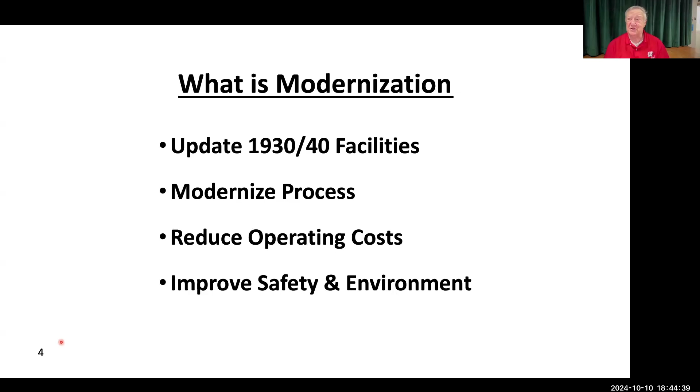What was the modernization program? In Dave Fordham's words, quote, 'The modernization program is a large-scale, multi-year program. Essentially, this program will replace most existing production facilities,' unquote. These existing facilities at Badger were built in the 1940s with 1930s technology, designed to last only 5 years. Then after 30 years, the facilities had deteriorated and worn out and had gone through 2 wars. Meanwhile, there were advances in technology that provided new processes that produced product better, cheaper, with less safety hazards to the operating personnel, and also improved the environmental situation.

The initial 1971 to 1980 modernization program - 10 years from 1971 to 1980, that's how long the initial program was. It was to cost $385 million, with 27 separate projects. Now remember, Badger is one of 25 ammunition plants, and all the other ammunition plants had modernization programs similar to this. So you can see there was big money, really big money, and by today's standards, even bigger money.

Here is a listing of the initial modernization program with its 27 projects. The projects are listed with the cost and the year of funding. The first projects in yellow are the only projects that were actually completed - those 5 yellow projects are the only ones that were actually completed. In the darker yellow, they were sort of partially completed.

Here's the year, 1971 to 81, and then you've got 27 projects going down here. Kind of small, but I think you can get an idea that there was a plan, and it was going to be money every year - $385 million. And we only did 5 that actually were completed. There were 2 that we did some work on. We did a lot of design stuff on some of these other ones, but some of them were just concepts. But that's what that initial 10-year modernization program looked like.

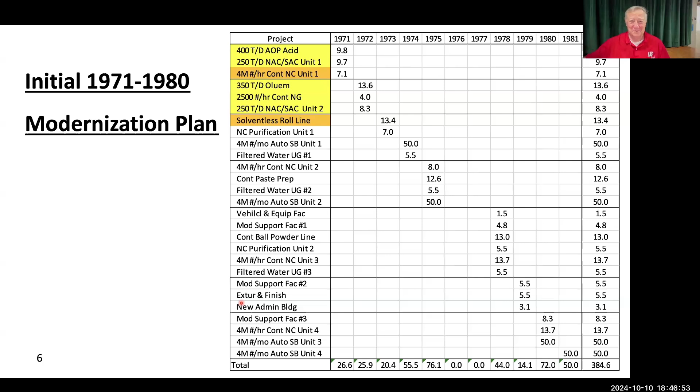So in here is where these projects were going to be. Now it's probably kind of hard to see, but here's a view of the map of Badger showing where some of these facilities are going to be. Now you look over here, here's where the main office building was, and one of the projects was to build a new administration building, a 5-cornered building, right there where the old maintenance area was.

Here's the first powerhouse, number 1. Here's the firehouse, which is still there. Then the new acid complex was out here, and there's going to be a new nitrocellulose complex right here. The nitroglycerin area stayed in the same place, only it was modernized. And then single base was going to be in all this area here in the northeast, where nothing was ever there, and new facilities were going to be put in.

Laboratory and ballistics used to be over in this area, was now going to be here. Here's the reservoir up on the hill. And then down here is the new shops area, going to be right in the middle of the plant. The rocket area stays in the same place, although it's modernized, and the ball powder facility stays in general in the same place, but would be modernized. And then the burning grounds would be moved over to the eastern side of the plant.

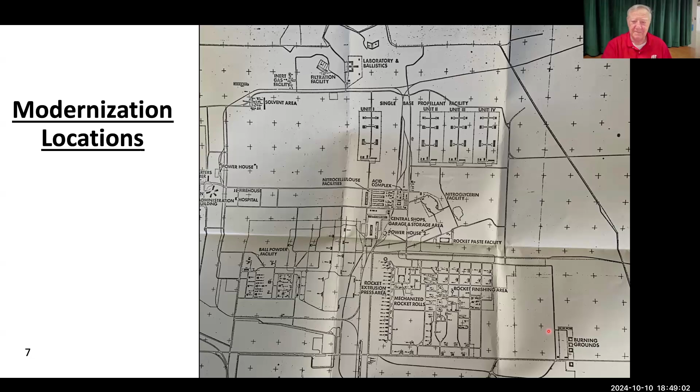The initial plan never happened like it just showed you. There were many changes. The time frame doubled to a 20-year plan from 1971 to 1992, and then it expanded a little bit beyond that. The total cost increased to over 600 million, and we only spent about 10% of that. Various utilities and environmental projects were added, increasing the total projects to 55.

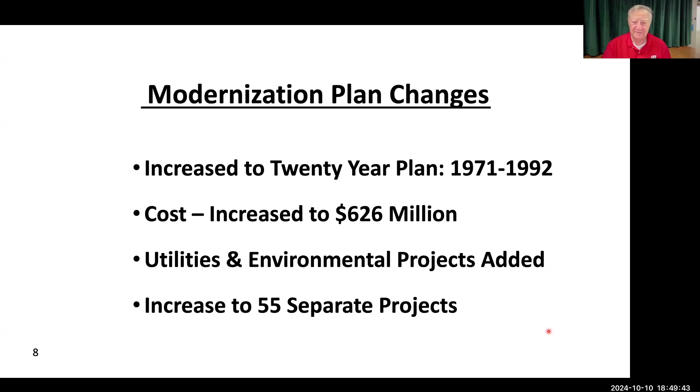The modernization changes happened in 1976. Major changes to the plan are shown here. Justification: we attempted to change existing facilities with the following priorities that you see here.

Economy of production, make things cheaper. Safety of operation, safer for the operators. Better pollution control - we knew at that time that we had to get better at that. Reduce noise. Overcome production deficiencies where we couldn't make something that we needed to make.

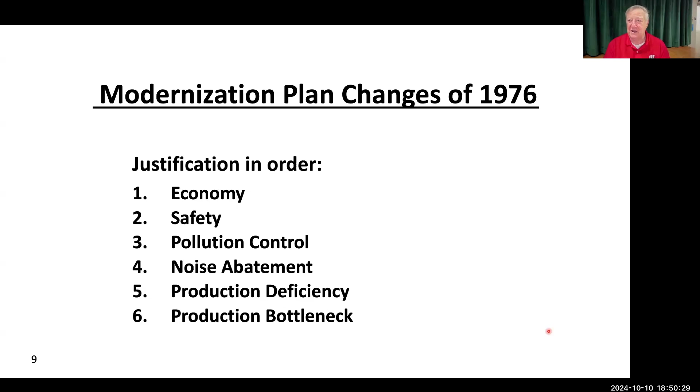And then elimination of a production bottleneck where we didn't know how to do something. Here's a listing of the 7 projects actually worked on. The last 2 were only partially completed, as you saw from the previous chart. Design and preliminary design work was completed on a lot of projects.

We had a 400 ton per day AOP nitric acid plant, 2 different nitric acid, sulfuric acid NACSAC acid plants, a 350 ton per day oleum or sulfuric acid plant, a 2,500 pound per hour nitroglycerin plant - I got to tell you a little story about that.

When we were trying to prove out the nitroglycerin plant, you got to do something with the nitroglycerin you made. Well, what are we going to do with it? We thought we could sell it to the people that make the nitroglycerin that goes into tablets for old people to make your heart beat better. Well, running our plant 2 hours and we had a year's supply of nitroglycerin. So we had to run it something like at least a shift or a couple of shifts, and we got so much nitroglycerin that we never did do a real prove out to make nitroglycerin, which is probably good.

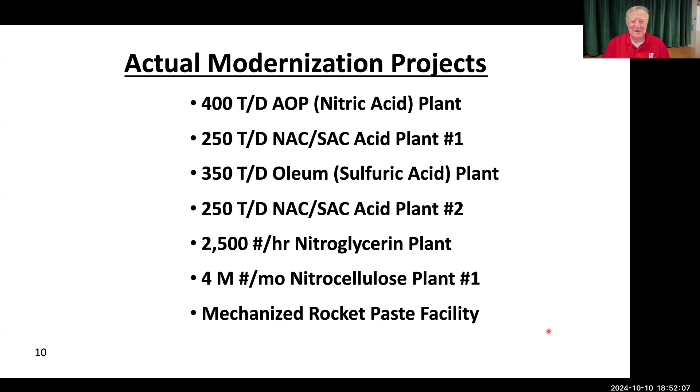The first project: the 400 ton per day ammonia oxidation plant, AOP, where we make nitric acid. We made 62% nitric acid from ammonia.

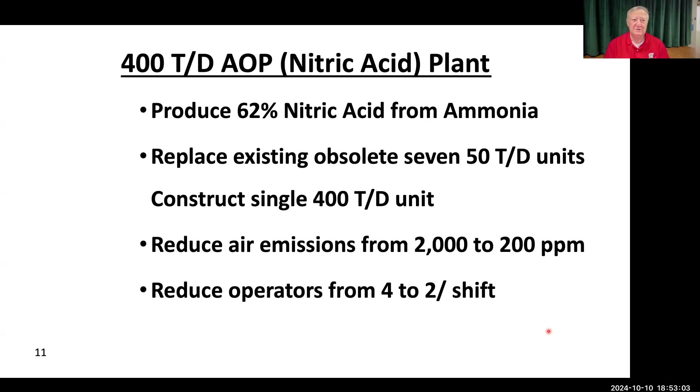The modern one-reactor plant replaces seven 50 ton per day small plants. The new process reduced the NOx, nitric oxide, pollution from 2,000 parts per million to 200 parts per million, and that at that time was within the pollution abatement limits. The number of operators dropped to only 2 - one on the line out in the process, and one at the control panel.

This little schematic shows the existing plant up at the top and the modern plant. Here you have all these compressors, which I'll show you a picture of, and a bunch of reaction vessels in this house. You replace that with one compressor and one reaction vessel - eliminating a whole bunch of things, replacing it with one big thing.

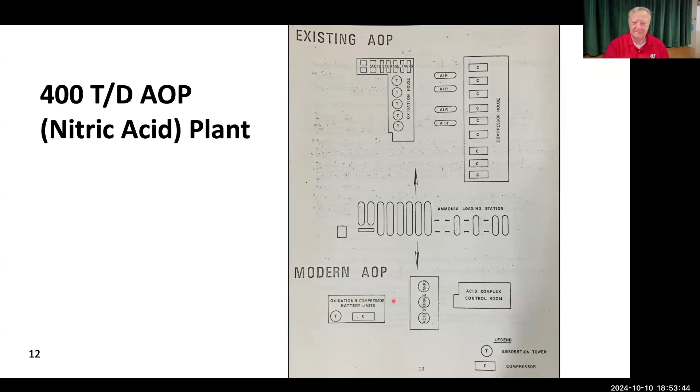More on the AOP project. It was designed by Chemical Construction, a company from Canada. Design was completed in July of 1975, construction started in July of 1973, and was completed in August of 1978 - 5 to 6 years. The first prove out happened in August of 1979, and from that there were only a few minor corrections that had to be made.

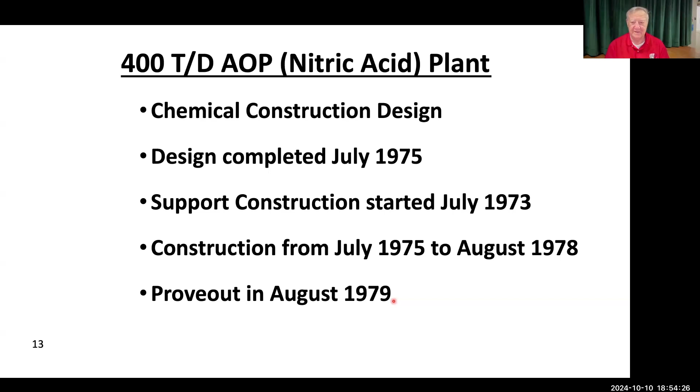Here's a picture of the old AOP nitration building. Big building made out of wood, and wood and nitric acid don't go together too well, so it's starting to come apart.

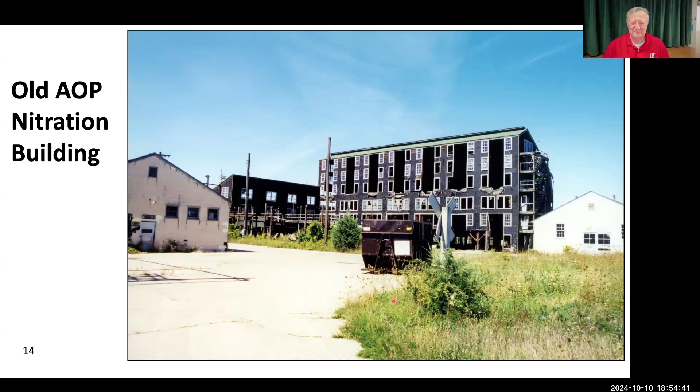Here's that old AOP compressor. This big wheel here is about 6 foot in diameter, and there was a belt that went across here, down around here and back. It was driven by an electric motor and compressed air here, and compressed air was pumped into the reactor where it was mixed with ammonia.

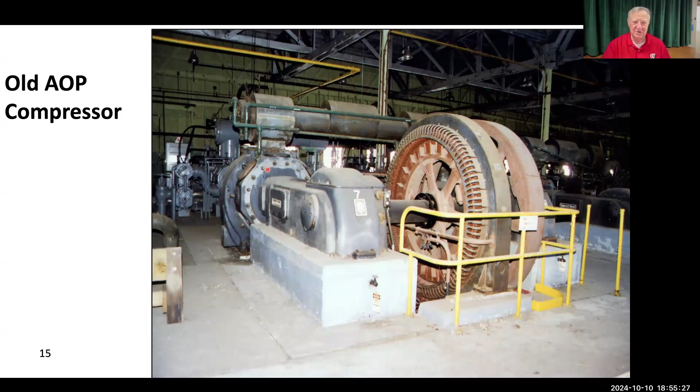This is replaced with a new AOP plant. This is looking towards the west - the administration building is out here, here's the main road coming in, and here's the reaction vessel right down in here.

Another picture of that - this is the absorption tower, about 180 feet tall I believe. Then here's the storage tanks after you made the nitric acid.

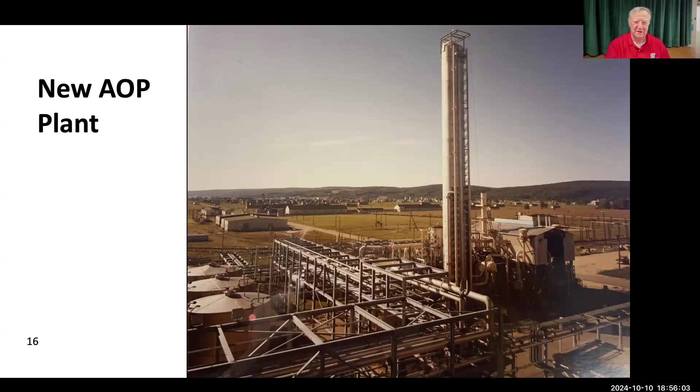Here's another picture looking towards the east, showing that big absorption tower. The operating building is right behind the speed limit signs, and these are ammonia tanks here - ammonia was brought in by rail. This big building is the NACSAC building, which I believe is 150 feet tall. Very big buildings compared to the old ones.

Over here in the corner, you can see the little edge of the main control building, and the controls for the entire acid complex were in this building.

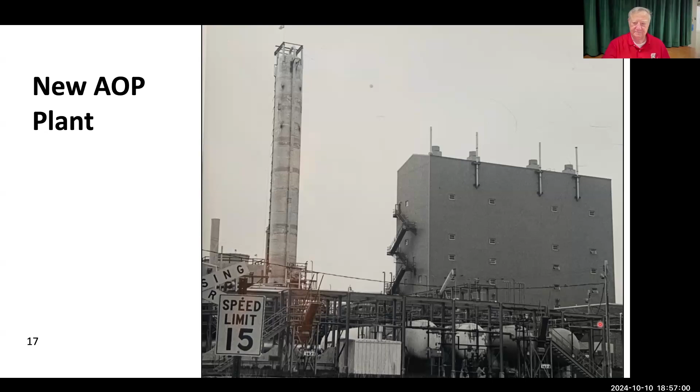Here's during construction of the AOP. This long train here is the heat exchanger. The actual reaction vessel is right here, this vessel here. And here's where the platinum gauze, where the ammonia reacted with air. In the old facilities, this vessel was about 32 inches in diameter, and this one is around 6 feet in diameter. As you can see, quite a bit bigger.

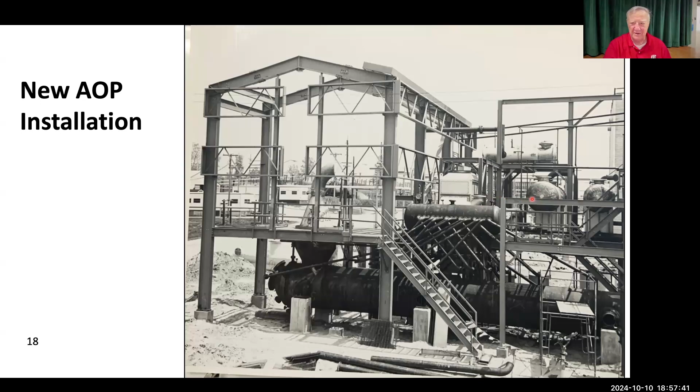I'm not sure where that went, but it ain't here no more. I had heard that it went to China eventually. I know the plant went to Louisiana to start with, and from there I think it went to China.

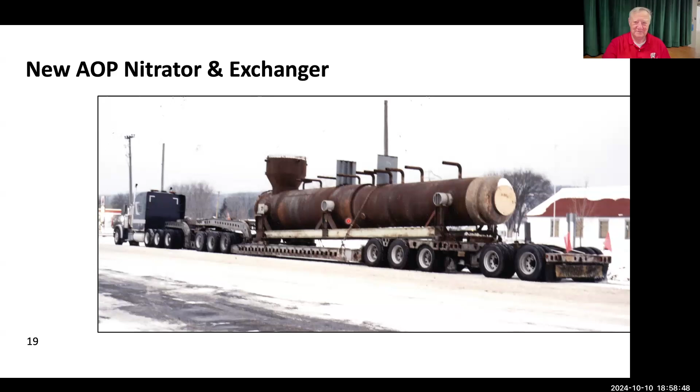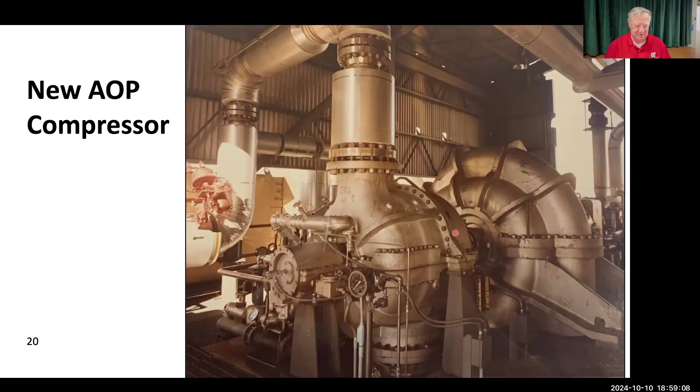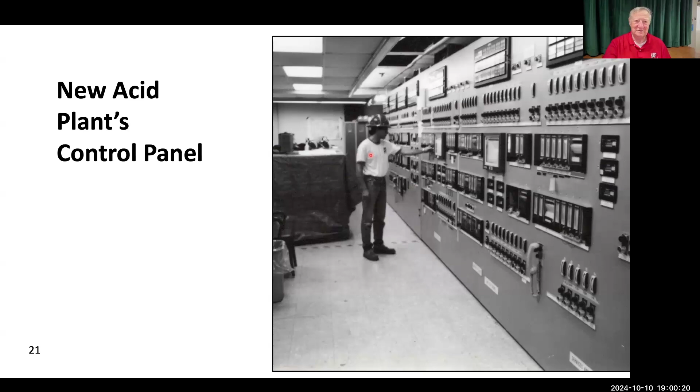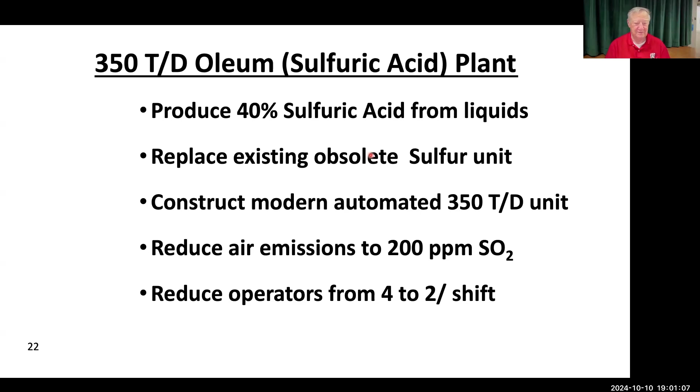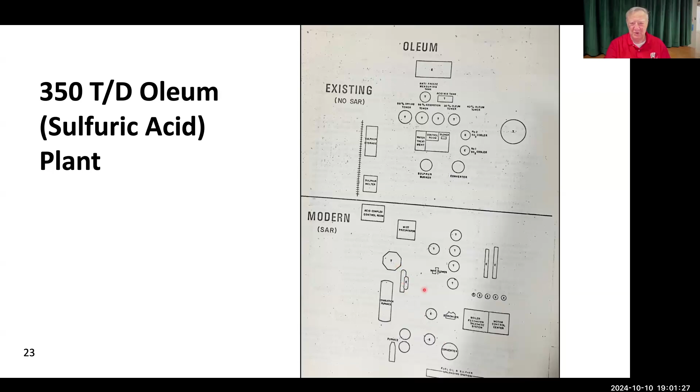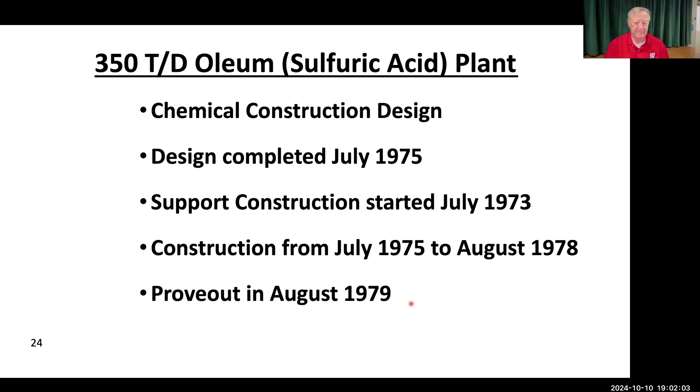This is on the south side of the acid complex.

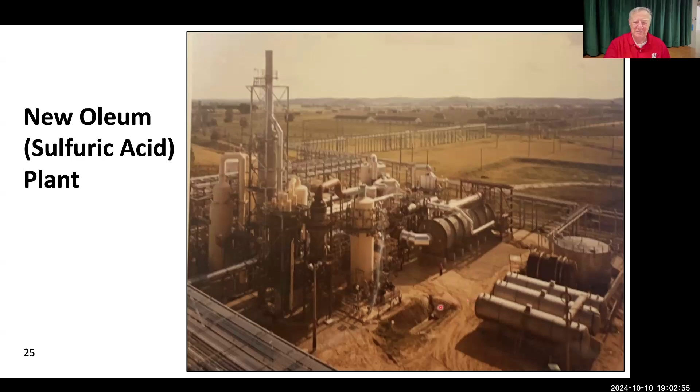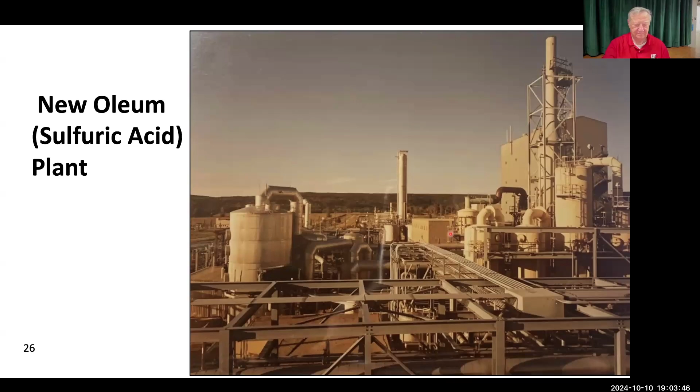Next project, the NAC/SACs: nitric acid, sulfuric acid concentrators.

This plant produces 90% sulfuric acid and 98% nitric acid, and it replaces these obsolete units. The new process reduced the NOx air pollution down to 200 parts per million, which at that time was the limit. The number of operators was reduced from 4 to 2: one person out in the plant and one person on the control panel.

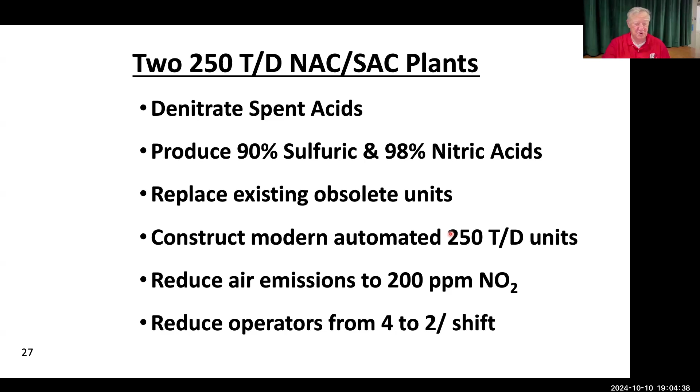Here again is another little sketch of the plants. You see there's separate NAC/SAC buildings, process buildings, a lot of tankage, different parts to it, where you put all these buildings into one building. This shows the three of them, but they're all in the same place, the same building. A little schematic showing you go from a lot of processes down to a single process.

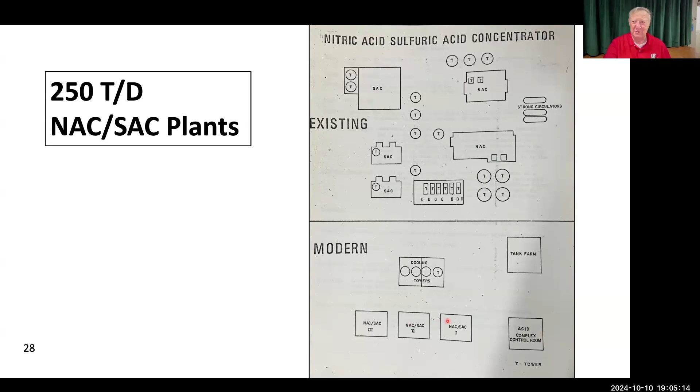These NAC/SAC plants were also chemical construction design from Canada. The design was again completed in July of '75, and they started construction in '73, and construction was completed in '78. And again there was another initial prove-out in '79, and they found a few errors. They were a little more serious in this case, but there were errors that were found.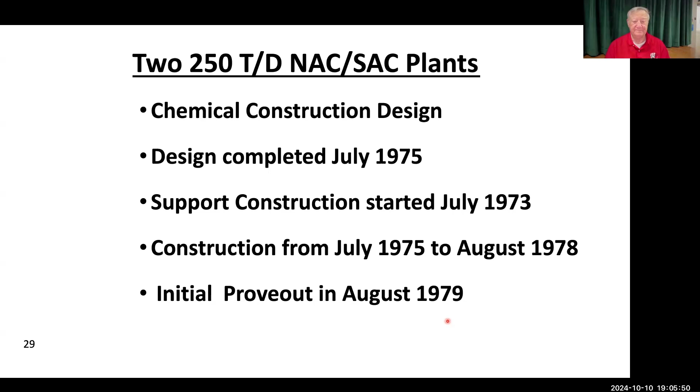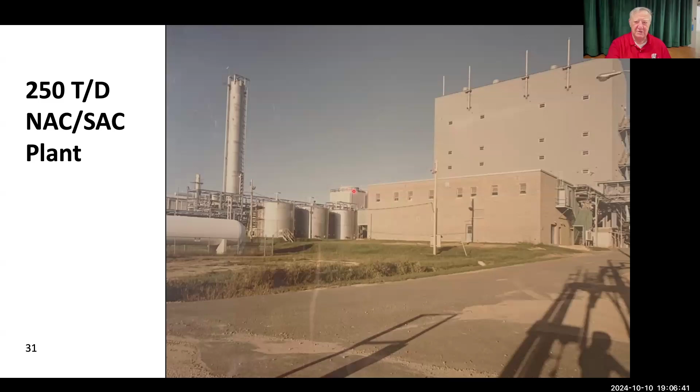Here's what it looks like inside, 250 ton per day NAC/SACs. And you can see it kind of looks complicated. Well, it is complicated. It seemed to me about every kind of metal that you can think of was used. There were titanium tanks, titanium pumps, molybdenum was used a lot, these exotic metals that went into this facility.

And there was also this tank over here, I believe, an old-fashioned lead tank. I remember we took a group of Boy Scouts into the plant to show them all this, and I was worried because when you get way up at the top of this building, you can look down 150 feet, and these Boy Scouts running around there are curious. They want to try things, look all over, and I didn't like that. But when I told them, look out there, that's a lead tank, all of a sudden they got away from that. Lead's bad for you, well, at certain concentrations, yeah, and you shouldn't lick it. But then who's going to lick the side of a lead tank?

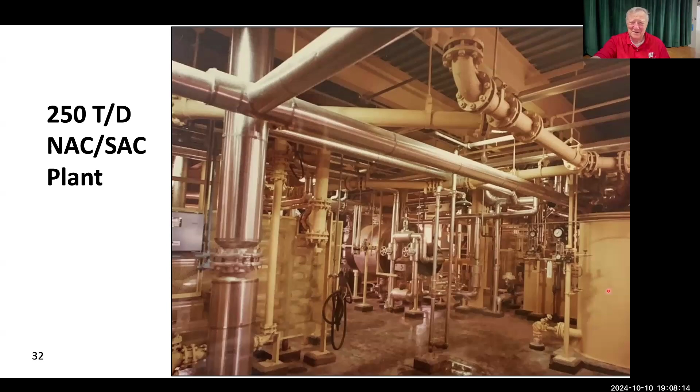Here's another picture on the inside, all kinds of piping all over. Well, I don't want to get into details about what's what, mostly because I'm not sure.

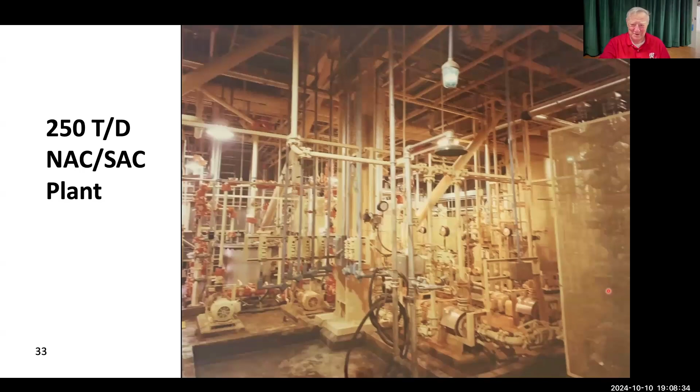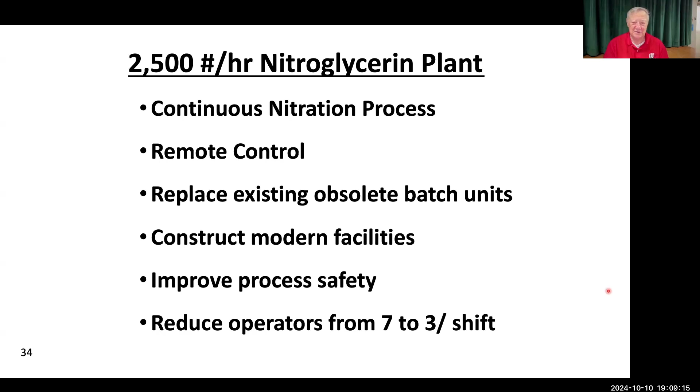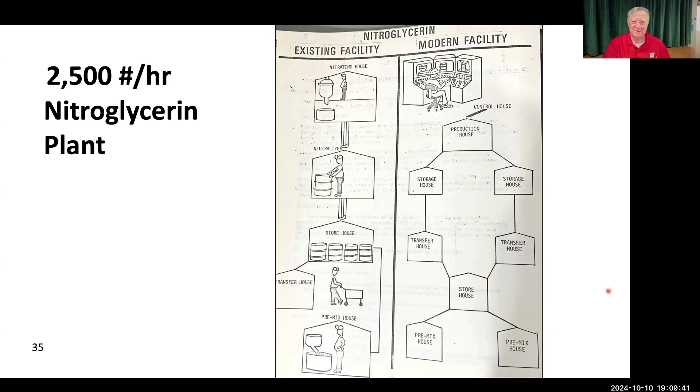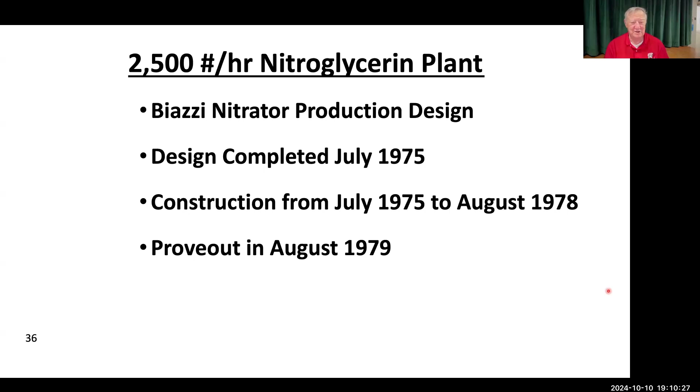The nitroglycerin plant was a modern plant from the Biazzi design, and Biazzi's from Switzerland, but the actual plant was built in Italy. The design was completed in July of '75, and construction, like the other plants, ran from '75 to August of '78. The first prove-out happened in August of 1979. As I mentioned before, the prove-out, all we did was make water, we just made sure all the instrumentation worked, but we didn't make any real nitroglycerin. But we still needed some minor corrections.

When they decided whether it was worth demolishing, it was difficult because these buildings were built to contain a nitroglycerin explosion of 12,000 pounds, which is an awful lot. You've got a lot of concrete and structural steel in the concrete, so it wasn't worthwhile demolishing. They just kept it there because it was never contaminated. So it's essentially a brand new building, but if you know where to look, Dan can tell you where it is. It's off the beaten path, you've got to look hard to find it.

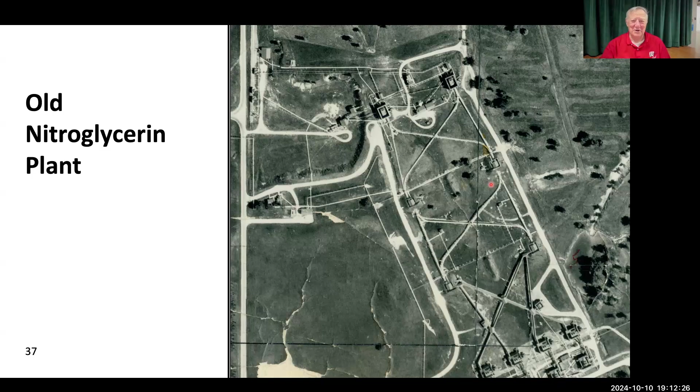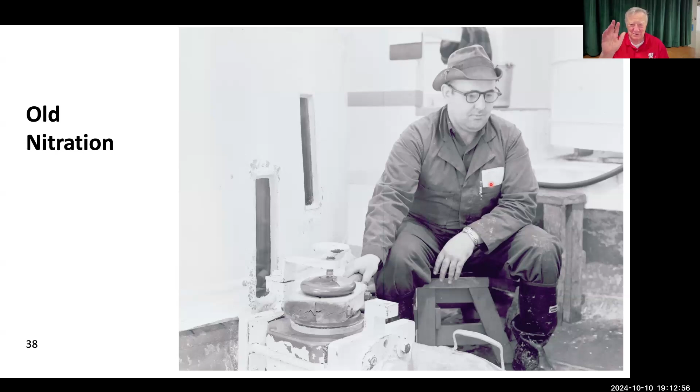There's what an old nitrator looks like. He's sitting there putting glycerin into nitric and sulfuric acid, holding on to the line that feeds the glycerin flowing into the nitrator. As you can see, that might not be exactly the safest thing one could do. If he doesn't pay attention and makes a mistake, well, that's the way it is.

The new Biazzi equipment is all mounted on one wall, a stainless steel wall, and here's the reaction vessel where you put the glycerin into the acids. The mixture flows out, swirls around and separates, where the spent acids go down here and the nitroglycerin overflows into these washers. All this is happening continuously. It's washed 3 times, then the washed nitroglycerin goes into this vessel where it's educted with water down into the storage areas.

New Biazzi design. Since it's made in Europe, in Switzerland, they made it all look fancy with decoration on the side of the vessels. Over here in the United States, we don't make vessels fancy like that because it serves no good purpose except looks nice.

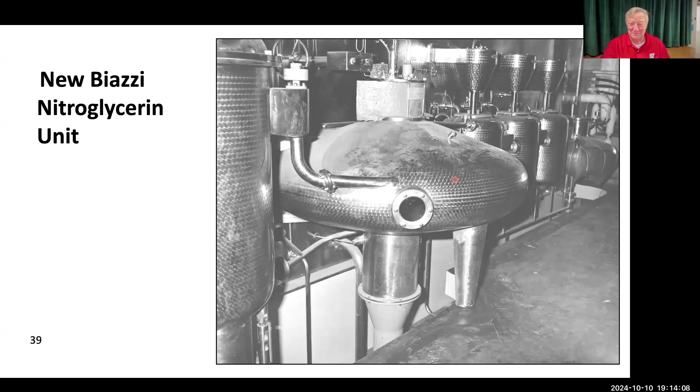Here's the new Biazzi remote control panel. You're 150 feet away from where the nitration is happening, and it's also taking care of the storage areas. There'll be an operator that sits at a desk here and operates from these two panels.

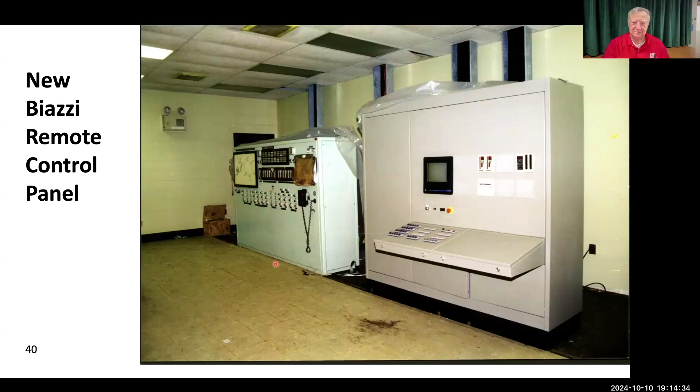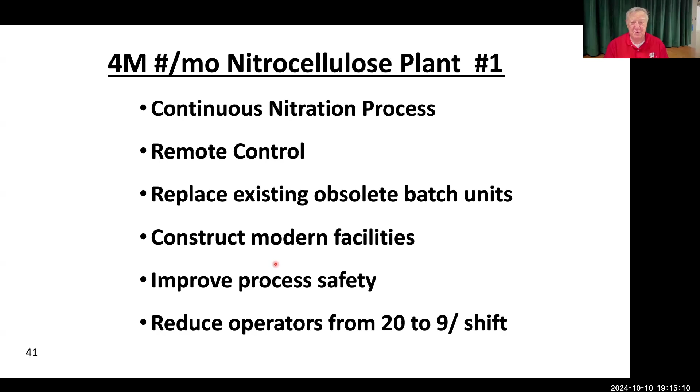Next modernization project is the first of 4. It was going to be 4 nitrocellulose plants, but none were ever completed. The modern plant was a continuous process that replaced 8 batch units per plant, and it was to be remote controlled. The modern plant was to have new facilities to improve safety for the workers, and the number of workers dropped from 20 down to only 9 per shift.

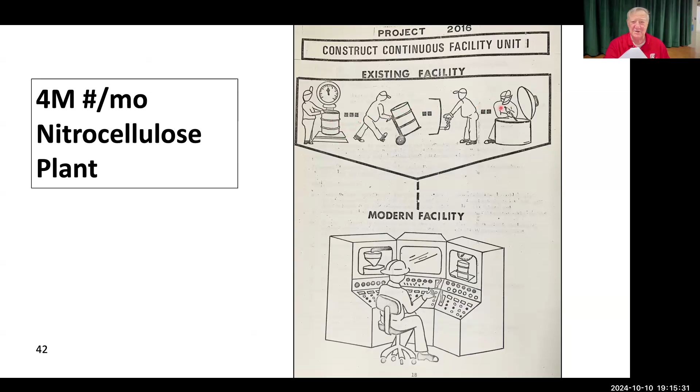Here's another schematic showing the existing facility versus the modern facility, where you have a guy sitting at a panel watching things happen, compared to the existing facility where people physically did things, moving the product around.

This modern continuous plant was a Hercules design developed at Radford Ammunition Plant. The initial design was completed in 1975. Construction never started; only a few process vessels and some pumps were bought. We redesigned the process to be installed in Badger's F line during 1987 and 91, but again we never constructed anything - it was just designed.

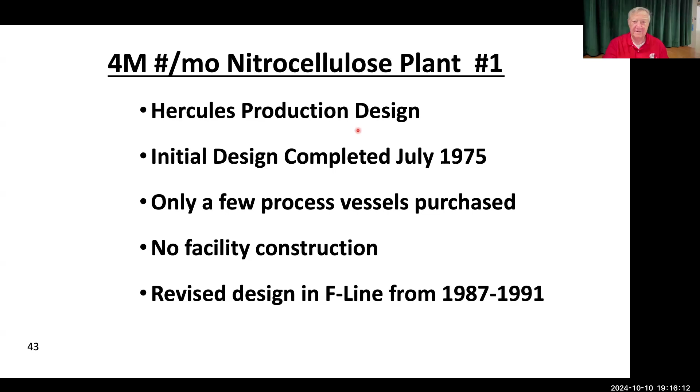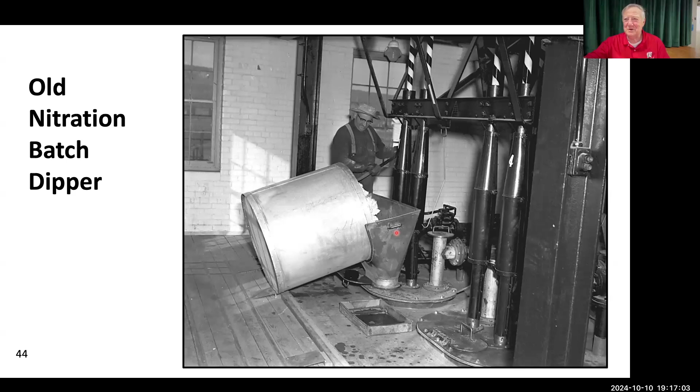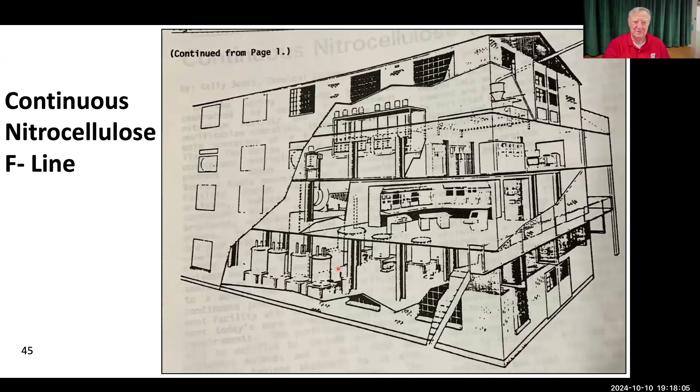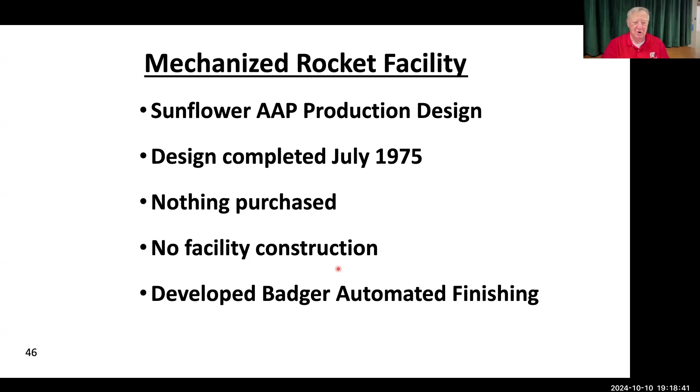The last modernization project that we actually did quite a bit on was a mechanized rocket facility. That design was developed at Sunflower Ammunition Plant, and the initial design was completed in '75. We never purchased anything in this particular facility. We never constructed anything, but we later developed our own automated rocket finishing facility, but that came later.

This project was to modernize the entire rocket production area. But again, only the finishing area was really done our way rather than Sunflower's way. The modern rocket finishing was a continuous process that replaced existing obsolete manual operated batch units. It was remote controlled—the modern facility was remote controlled.

And the new facilities improved the safety of the workers, and also the quality improved. With only the finishing area modernized, the number of operators still dropped from 10 to only 2 per shift. The finishing area modernization was completed and proven out in July of 1994. That was the last significant amount of work we did with the modernization program.

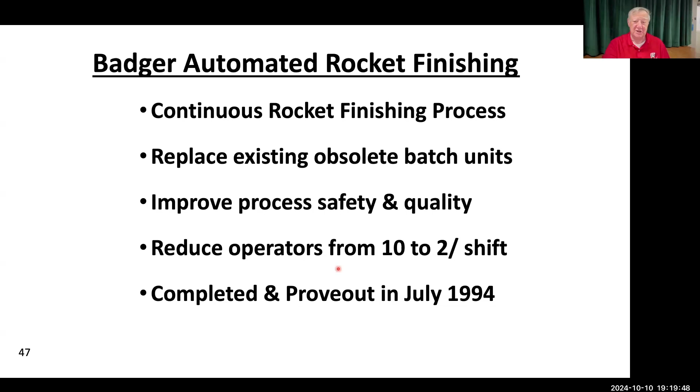Having trouble with my last page.

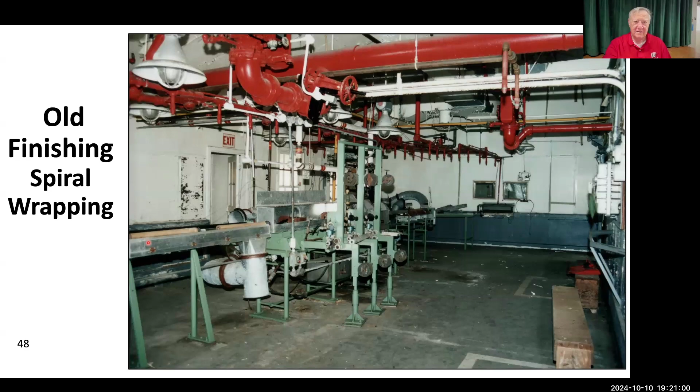A summary. We completed only 5 of the original 27 projects. We partly completed 2 others. We spent something around 53 million of the originally planned 600 million. The time frame was 24 years, from 1971 to 1994.

And we never did any actual production. By that I mean we made product for several months and it went to use for the Army. We never really did any actual production in new facilities. Even the acid we made, and we made quite a bit of acid, we shipped someplace else and somebody else used it. It was never used here for our own production. And that's the end. Thank you for listening.

Are there any questions?

They explained that oleum is basically a super sulfuric acid. So we have sulfuric acid, like in your car battery. You take sulfur, burn it to sulfur dioxide, give it a little more oxygen over a vanadium pentoxide catalyst, and you come up with sulfur trioxide. The sulfur trioxide plus water equals sulfuric acid. So actually putting the sulfur trioxide into the sulfuric acid was the better way to make it—then you just add water to get instant acid.